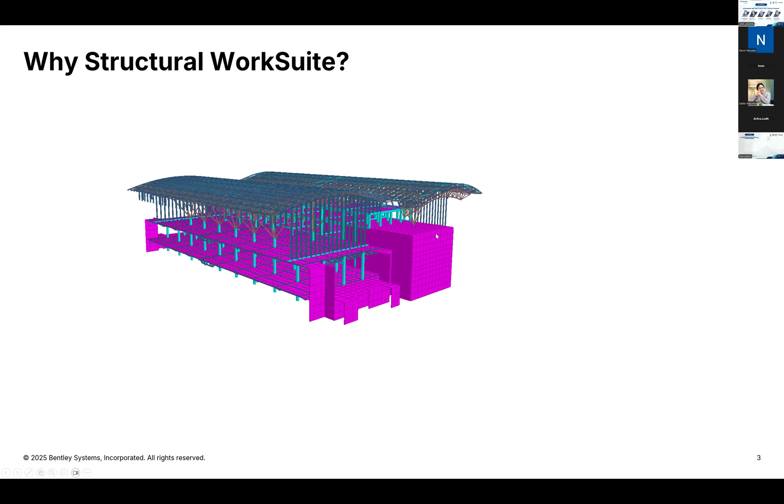Now you might have a question: why am I talking about Structural WorkSuite? Generally, our projects are something similar to this—we not only simply create our model, we will have to analyze and design our model as well. So our model can simply be a concrete structure, can simply be an industrial shed or any steel structure, or it can be a combination of steel structure and concrete structure. In such a case, I'll show you how we are using Structural WorkSuite.

If you're having a project, to be honest, and if you plan to start your model and complete it, we do not recommend you to only use STAAD Pro. We recommend you to use all the different products that we have to offer. There are several components to it.

First, we will have to analyze and design the steel members. We will have to design the foundations. We will have to design and detail the concrete slabs. We will have to design the steel connections, and the concrete column, beam, and shear walls will also have to be designed and detailed.

Then after that, for the steel structure part, we will also have to generate the general arrangement drawings, right? So these are all the different components involved in creating your project.

So for that, first, for analyzing both your steel and concrete structure, we can use STAAD.Pro. STAAD.Pro is also capable of designing your steel members.

Once that is done, we will move on to Steel Autodrafter, which is also present with STAAD.Pro. That is used for generating your general arrangement drawings.

Next, after you have created your steel model and generated the general arrangement drawing, you will go ahead with the steel connection design. For that, we move on to RAM Connection.

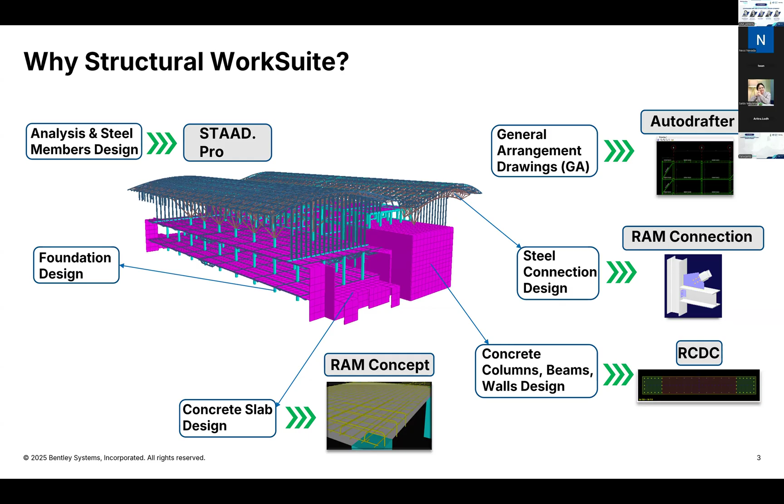If you are looking strictly to design your post-tension slabs, flat slabs, or RCC slabs, you can move ahead with RAM Concept as well.

And finally, without foundation, our project will never be complete. So for that, we will move on to new STAAD Foundation Advanced. These are all the products that we need to complete our project.

That is the reason I have introduced you to Structural WorkSuite. By the end of this slide, you should have a fair idea about the products you need to include in your project and which product is capable of doing what.

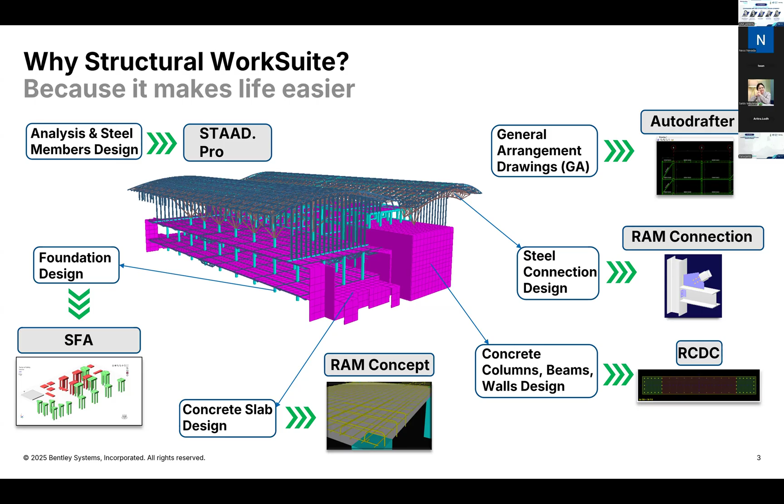Now let us move on to our next product, which is STAAD.Pro. The latest version of STAAD.Pro is STAAD.Pro 2025.

Let's talk about the versatility of STAAD.Pro, in which sectors can we actually use it. STAAD.Pro can be used in building sectors, power plants, bridges, industrial sheds, renewable, heavy civil industries, airports, oil and gas, mining sectors, and even transmission towers can be done in STAAD.Pro. Basically, you can name any sector and we have STAAD.Pro to help you in that particular sector.

If I talk about the multi-material design codes that we have, STAAD.Pro is capable of designing hot rolled steel sections, cold formed steel, concrete, aluminium, and timber. These are all the design codes available in STAAD.Pro, and when you buy STAAD.Pro, you don't have to buy the code separately. More than 90 multi-material design codes of different editions are already included within STAAD.Pro, and you are entitled to use all of them, anything that you wish to use.

Let's quickly have a look at all the advanced analysis capabilities of STAAD.Pro. STAAD.Pro is capable of performing static analysis and dynamic analysis. Under dynamic analysis, you can use response spectrum, time history analysis, and even modal analysis. We are also capable of dealing with P-delta analysis, geometric nonlinear analysis, and nonlinear cable analysis as well. Dynamic steady state analysis can also be done in STAAD.Pro.

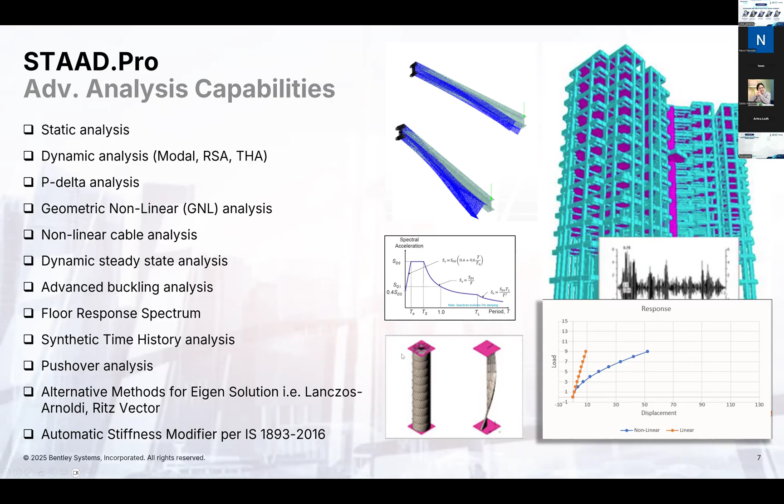You can do advanced buckling analysis, floor response spectrum analysis, and for time history analysis you can perform synthetic time history analysis and pushover analysis. For solving your eigensolution, you can choose between Lanczos, Arnoldi, or Ritz vector methods. These are basically all the different analysis capabilities that we have in STAAD.Pro.

Every year we come up with new inclusions and new modifications in STAAD.Pro. Let's quickly have a look at what new inclusions we have added in this version.

As I've already mentioned, we use different products to complete different parts of the project. For example, if I talk about foundation design, after we have created our model in STAAD.Pro, we can directly go to foundation design from here.

This is already linked with STAAD.Pro. We can directly move to STAAD Foundation and design the foundation there. So what happens is we don't have to manually input the reactions or the analysis data to foundation. STAAD Foundation Advanced will automatically import all the analysis data from STAAD.Pro itself, and the accuracy is very high.

We have actually tested it while developing this new product, so the accuracy of this data transfer is very high.

The new inclusion here is that STAAD.Pro has been updated to work more closely with the latest STAAD Foundation Advanced, which is STAAD Foundation 2025. This helps us with designing foundations like mat, isolated footing, combined footing, and pile caps, using the support reactions from the STAAD.Pro model.

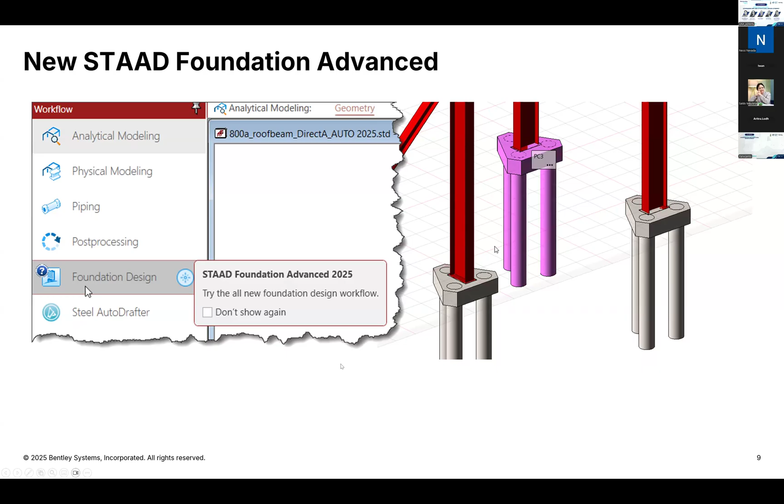Next, we have also come up with improved serviceability design. If you are designing a steel structure, there are two main things we check: strength and serviceability. Under strength, we make sure each part is strong enough to handle the forces on it. In case of serviceability, we make sure the structure doesn't bend too much, which could cause cracks. This is also called the deflection check.

To perform a deflection check, STAAD.Pro needs to know the real start and real end of your member or beam. If you see a single beam in case of a truss member, say the bottom chord, in STAAD.Pro whenever it detects any nodes in between, this entire beam will be divided into small fragments, small analytical parts. But in reality, this is a single beam, and we want to check the deflection for the entire beam. In such a case, we will have to instruct the program the real start and real end of this beam.

For that, there are two parameters used, DJ1 and DJ2. DJ1 marks the start node of your member, and DJ2 marks the end of your member. We perform this check for the local axis, both the local Y and local Z direction. Now you have the provision to add the start and end point of your members in both local Y and local Z direction.

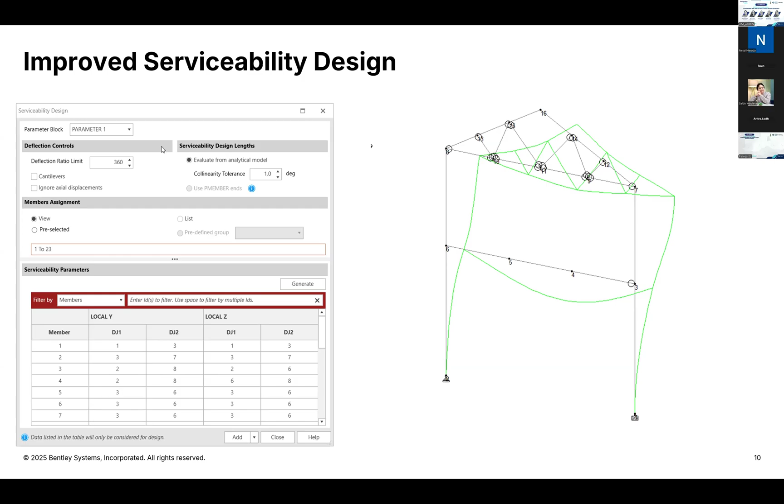Next is advanced combination rules. This is very important for users who are using Eurocode. In Eurocode, specifically EN 1990-2002, you have the provision to map the load categories to the Eurocode action, like mentioning which is your permanent or variable load, instead of just how STAAD does it.

STAAD basically tells you to mark which is your dead load or live load. But in case of Eurocode, if you want to mention which is your permanent or variable load, that can be done in this new advanced combination rule. This new system includes 11 Eurocode combination rules as of now, and you can customize your own combinations using Eurocode load types like permanent, pre-stress, accidental, seismic, and variable if needed.

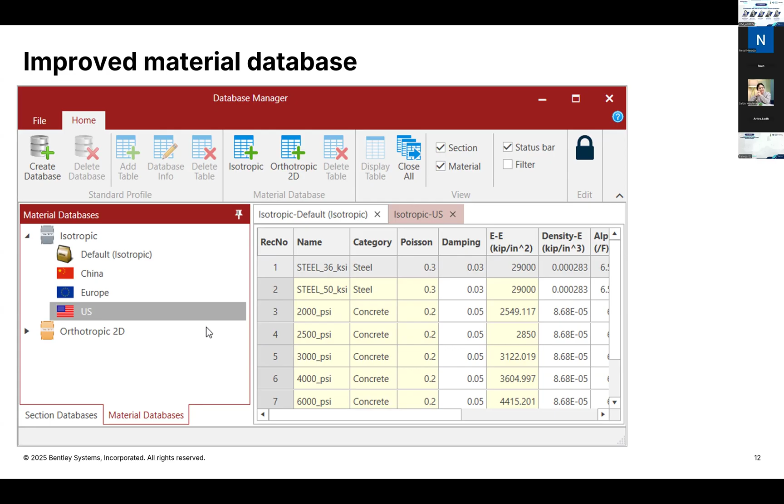This is basically how you can do it. This is the same example I showed you, how you can add your material. You can simply add it from here. You can name your material, the category, the Poisson ratio, damping, the density - all this information you can provide. And next time when you select the material, you can simply reach out to the material you commonly use or that you have created.

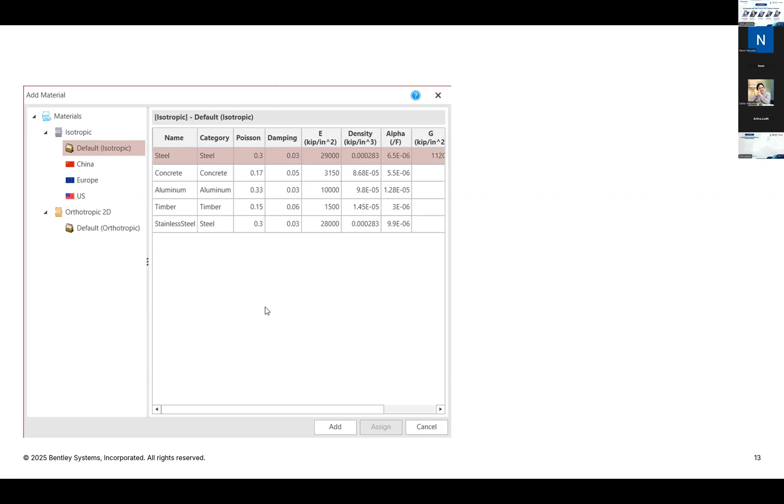Okay, so that was all I had to show or tell you about the new STAAD 2025. Now, let us move on to the interoperability of BIM with STAAD Pro. Before getting into the interoperability, there is one thing I would like to mention.

Previously we used to use ISM, which was Integrated Structural Modeling. ISM was Bentley's desktop level interoperability framework, and it basically focused on file-based workflows where structural models could be exchanged via an ISM repository. So whenever we used to create any model, we used to create the .ism.dgn file. For example, STAAD could be interoperable with Revit or Tekla. So whenever we are taking any model from Revit, we create one .ism.dgn file that we pull into STAAD.

Now we use iTwin Synchronizer. It's the same thing - iTwin Synchronizer is built on the same idea, but for the cloud. So instead of exchanging data via a local ISM repository, the iTwin Synchronizer publishes models to the cloud or iModel. We have the provision to export and import our file from the local file as well. But it still performs mapping or classification steps very similar to what ISM used to do, except the output goes to the iTwin ecosystem instead of just another desktop tool.

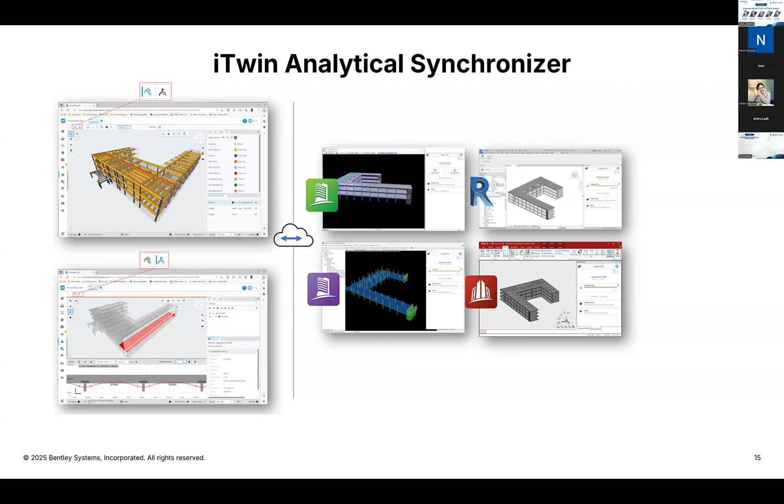So as I've already mentioned, there are two ways of doing it - two modules of iTwin services. One is via cloud, the other is from a local file. The file-based workflow allows us to synchronize our model locally, whereas the cloud-based workflow allows us to synchronize our model to the cloud. In today's session, we are only going to focus on the file-based workflow.

Here I have shown you the same way how we can do it - first we will review our model, and I will show how we can map our different structural elements, and finally we will be able to pull it into STAAD Pro. This is how the interoperability looks like. This is my model, and this is how, once we have pushed it to the iTwin model, it looks, and finally we will be able to pull it into STAAD Pro.

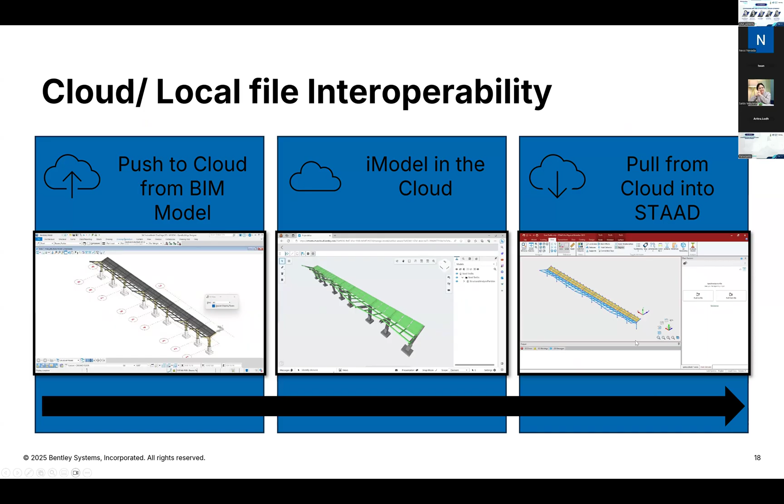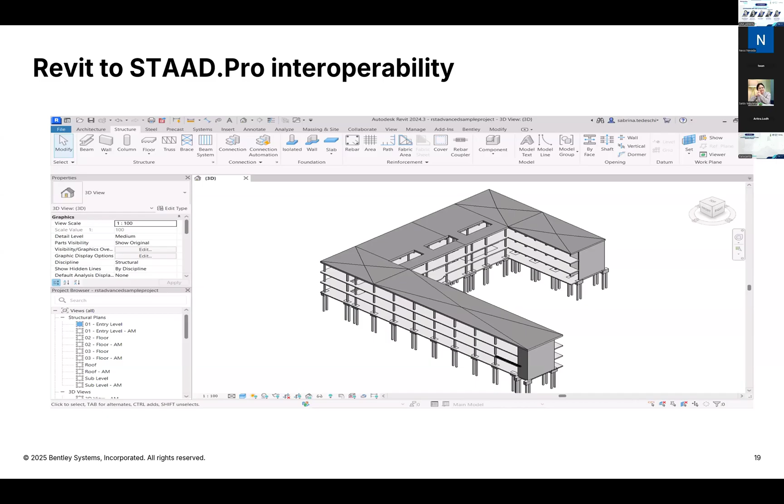Okay, since I have already recorded this part, not the entire thing, I recorded the part where I opened the third-party software and showed how we can map the structural elements and bring it to STAAD.Pro. That part I've shown because of my organization policy, and I have not directly opened the software, but recorded this part for you.

So I'll just play. This is Autodesk Revit that you can see. And here we have a tab called Bentley, where we have an option called iTwin services. Under iTwin services, we basically push our file to the iTwin services.

So what happens here is when we push, we are sending the latest version of our design files from our desktop to the project iModel. That is necessary. Once that is done, once we have pushed our model, we will save it.

And here if I show you, I'm just pushing my model. And this is how I will be able to map it. So whenever we are bringing the Revit model to STAAD.Pro, we are basically mapping. You will see different mapping we are doing.

We are going for load case export mappings. We will go for material mapping and structural components as well. So basically mapping refers to the process of transferring and aligning elements, materials, or structural properties between the two programs so that the model behaves correctly.

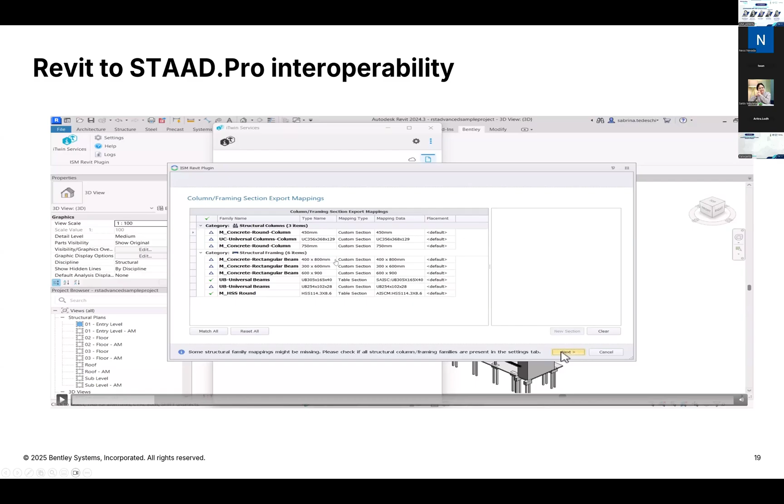Similarly, I'll map the materials, and this is the columns. Some of them will be read by STAAD.Pro as a UPD table, or user defined table, but that is fine, we will be able to read it.

After that is done, we will export the members, and this is how the export is happening. So the process is very simple: once we open Revit, we go to the Bentley tab, which will automatically be there.

Once we enter the Bentley tab, we go to iTwin services. Under iTwin services, we will save this model and push our file. After pushing, we simply map the loads, materials, and sections. Once everything is mapped, the data starts to export. Here we can see the ISM Revit plugin being used, and finally the model has been successfully pushed.

Now once this is done, this is how the iTwin Analytical Synchronizer looks. From here you will be able to add certain components - all the different components are getting shown to you, so whichever component you want to export, you can select it from here.

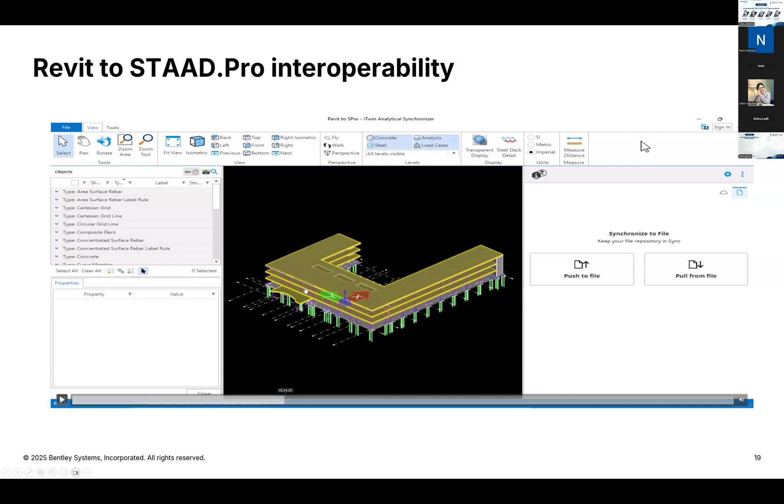Whichever component you do not wish to export, you can simply omit at this stage. Say I don't want to export the top roof, or maybe this part - in the iTwin Analytical Synchronizer I have the provision to either include or omit a particular component.

Now once this is done, we have successfully pushed our model. Now we will open STAAD.Pro and simply pull it from the I2 analytical synchronizer. We can only pull our model in the physical modeler. We have the provision to import in the analytical part as well, but I'm showing you the physical modeler. STAAD.Pro comes with two different modules: one is analytical, the other is physical.

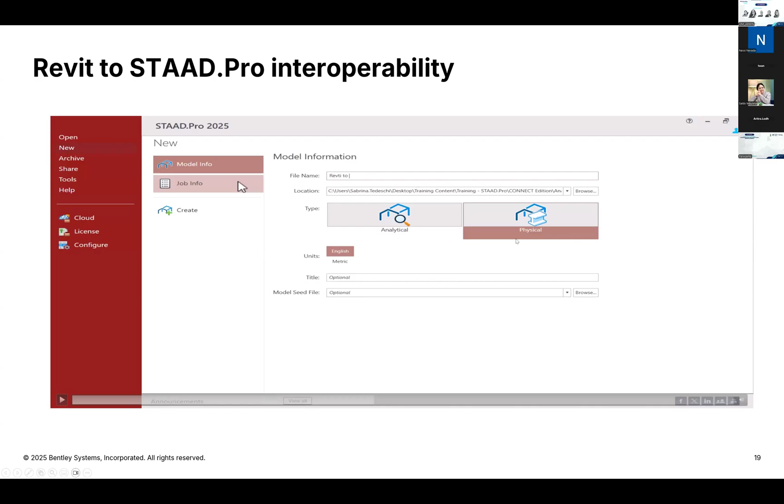Okay, if I open the physical module, it looks something like this. In STAAD.Pro's physical module there is also an option called iTwin services, just like Revit. If you click on iTwin services, you will have the provision to pull your model.

Yes, this is the one I was looking for. So whenever you're importing any model from any third-party software, you will pull it. And in case you are exporting your model, you will push it.

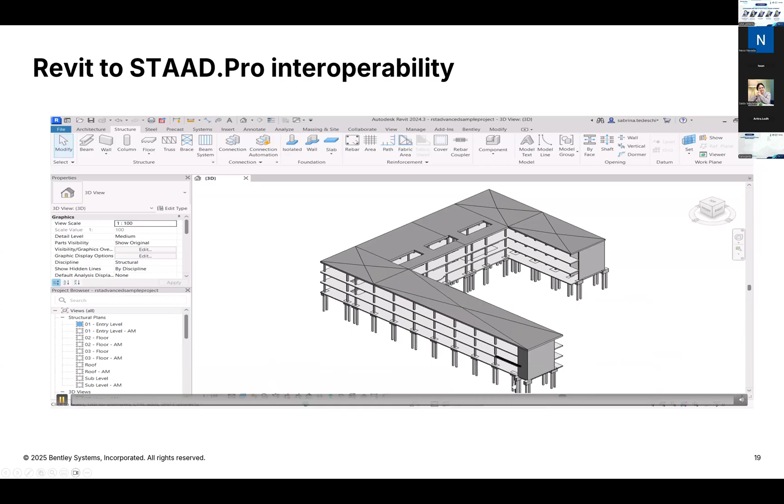Just give me a moment.

Okay, we will pull it. Once we have pulled it, there are two options, two ways how we can do it, as I've mentioned. Either you can use the cloud thing or you can use the local file. In my case, I will use the local file. So here you can select the .ism.dgn that we have created, and you will simply open it.

Once we open it, it will import the entire model. Now, till here, this is the process. Now I will quickly start sharing the model with you.

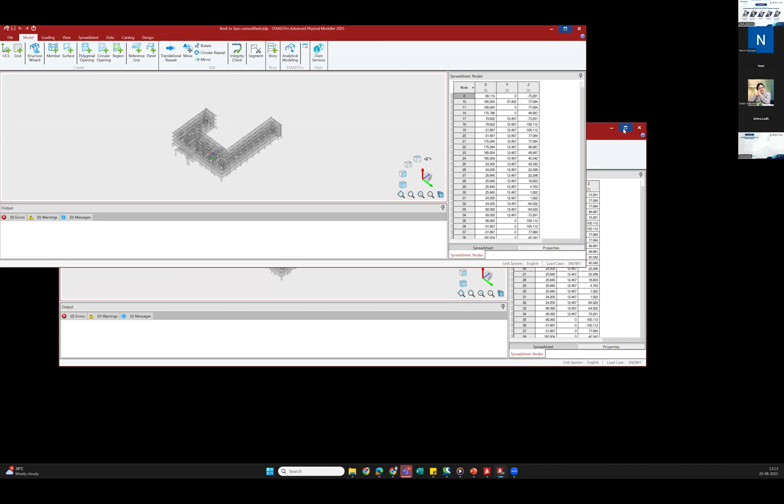Can you confirm if you can see the STAAD.Pro model that I'm showing? Yes, can see, Aritra. Okay, thank you. So this is the model that you can see.

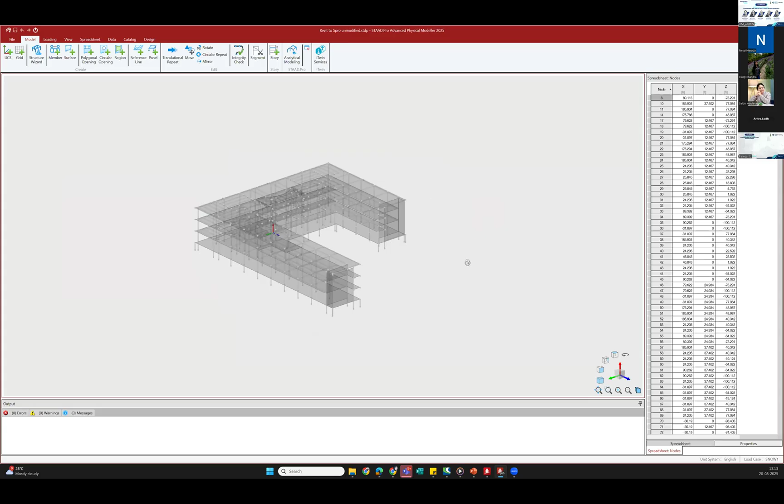So this is the 3D rendering. If you wish to change the view, this is how you can see the model has been exported. And we imported it to STAAD.Pro, and the same model was shown to you in Revit.

If I go to the catalog, you can see these are all the different materials that has been used. These are all the sections.

And if I analyze, you can simply analyze your model from the view tab, and then you will be able to bring it to the analytical modeler.

Now in here, you also have the provision to add your loadings. So if you want to add any particular load, you have the provision to do that as well.

So here you can see we have a live load, we have a snow load that is already there. In addition to it, if you want to add any load case, you definitely can add your own load case in here. Or some of us also prefer to add the load cases and load combinations in the analytical modeler.

In such a case, you will simply go to the analytical modeler, return to analytical modeling, and it will take you to the analytical modeler. This is how it will do.

This particular model will take a lot of time because it has got a lot of plate elements already attached to it. So what I will do is I will take a very similar model that also I have imported from Revit, and it's the same model almost, you can see.

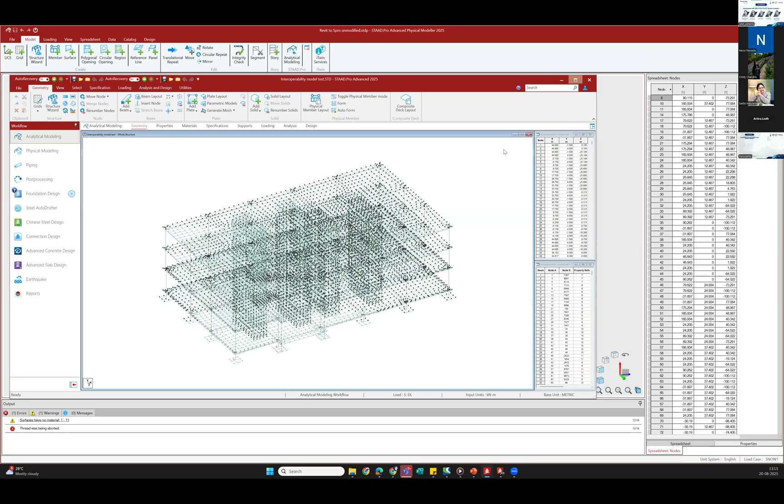I've just taken a part of it and I have already imported it to analytical modeler. Okay, so this is how the model will be imported.

You can go ahead with the properties. You can see all the different properties that I've added. Just give me a moment. Let me... Okay, so you can see all the different properties that we have added in here.

All the UPT files I've mentioned you that whenever we are importing any model, some of them comes as a UPT file, user defined profile. And the plate elements, they are also added some plate thickness to it.

Now, if I go to the loading, you will see that all the loads are also imported. Your dead load, live load, along with some combinations are imported. In my previous model, I had live load and snow load, but in this model, I have the dead load and live load.

Once you have added all the load cases, you also have the provision to modify your model at any given point. You can add some supports, or you can add any release conditions to your model, whatever you want, you can change it in this position.

Once that is done, under analysis and design, you will simply run the analysis. So we need to analyze our model. Just excuse me because I have two different monitors here, and you can see my model is getting analyzed.

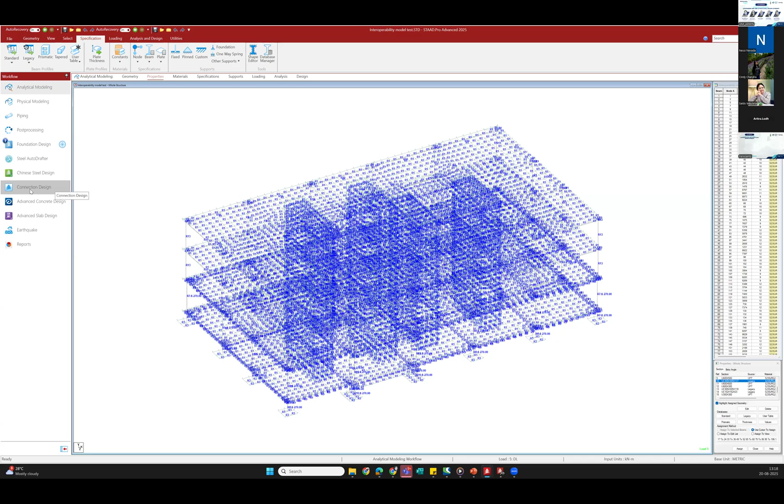As I've already mentioned in the workflow, you don't have to go anywhere. In STAAD.Pro itself, there is a provision to design the connections. If I click on connection design, automatically it will direct me to RAM connection, which is integrated within STAAD.Pro. The main USP of this is you don't have to manually add the input, the reactions, or the member end forces or anything in here. You will simply see that your model is getting transferred to RAM connection.

Now, if you wish to see which are your beam column flange joints, you can see that. These are my beam column flange joints. If there are any other beam column web joints, you can also see that these are the beam column web joints.

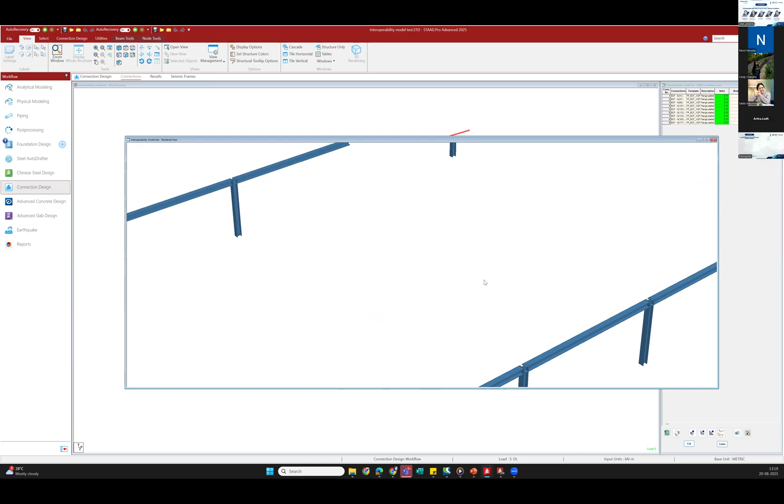So say for example, if I go to the beam column flange joint and just view the selected objects, if I go to 3D rendering and expand this here, and expand this even, you can see STAAD.Pro RAM Connection is automatically detecting which joint is my beam column flange joint. These are the joints that are present in my model, and it is already detecting that this is my beam column flange joint.

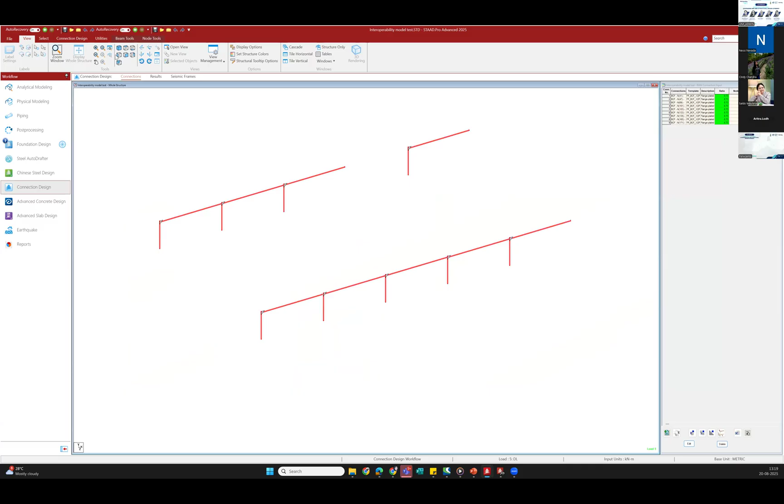Similarly, if I go to view whole structure, go to connection design, and show you the beam column web joints, if I view the selected objects and perform the 3D rendering, here also you can see this joint is through my web. So RAM connection is automatically identifying the joints based on the geometry that we have created.

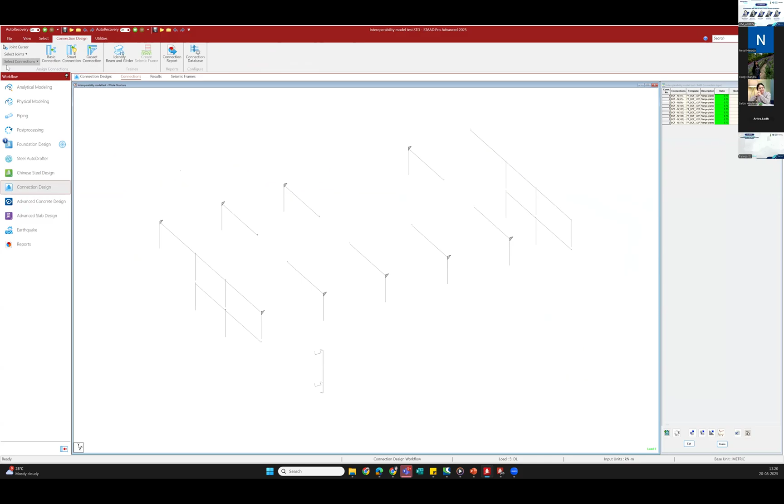This model was actually created in Revit, right? And from there we have imported to STAAD.Pro, and from STAAD.Pro we have analyzed it, and then we have got it to RAM connection. So you can see how smooth this interoperability is. And if I go to view, display whole structure, so this is the entire model.

Now for this session, I have already created a beam column flange joint. I have already designed one connection for you. If I double click on it, you will see it has opened somewhere. This is the joint that I have selected, and you can see the demand versus capacity ratio. These are all marked in green, which means all of them have passed. The limiting value, as usual, is 1, and this is how the joint looks like.

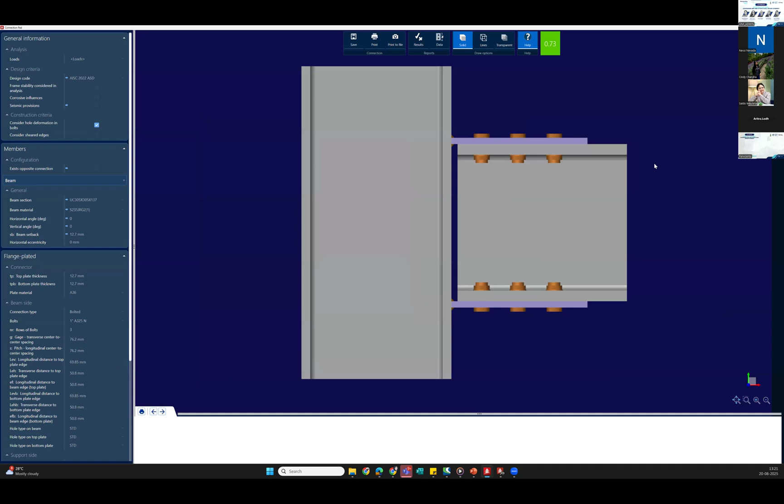This is the connection that we have designed, and this is the line diagram that you can see, which helps you understand the connection better. If I want, from here this is called the connection pad, and in here you will be able to make changes. So if you want to change it to a weld, you will see it getting changed to a weld, but the demand versus capacity ratio changes, which is very obvious. So based on the connection, this demand versus capacity ratio will be automatically updated.

From here also, you have the provision to select the support type, if you want to change the top plate welding, whether it's fillet or if you want a full penetration. All this information we can change. The pitch, the gauge of the bolts, the number of bolts in a row can be changed. So all this information can be manipulated from here.

Now, once this is done, I have the provision to check the report. This is how the report is going to look like. I can also fetch a detailed report with the design calculation.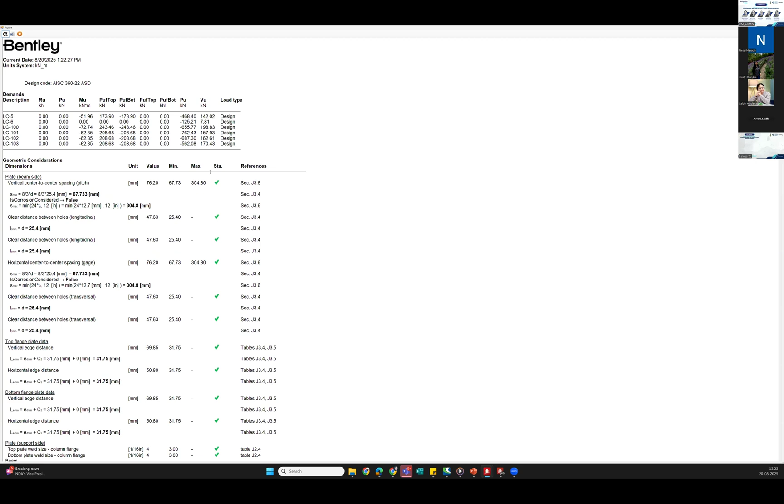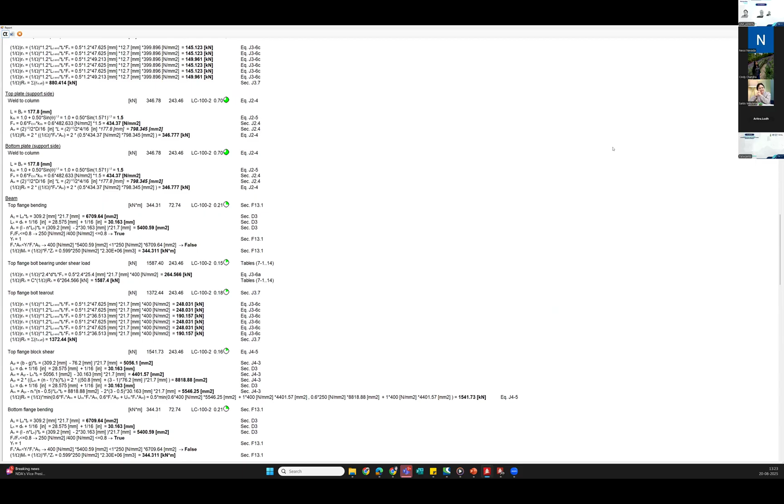Yes, so you can see a detailed calculation along with the formulas shown to you with the codal reference. So you definitely can save it in a doc format and produce it to your clients. So the interoperability is that smooth. That's all I wanted to show you, and you can also see how easily you can get all the different reports from STAAD.Pro. So this is what I had to show you for RAM connection.

Now, similarly, you can do it for the base plates. You can get the report for the base plates, and for any braces, that also can be done. So that is a different discussion.

Now, if I go back to my analytical modeler, and this time if I want to design the beams, let's go to the advanced concrete designer, which will take me to RCDC. So here, let's take the beams for instance. It will take some time to open RCDC.

Just allow me some time.

Hi Aritra, hello. There's feedback from participants asking if we can go a bit slower. I'm so sorry, yes okay. Let me know where I should start and I can go back to that same step. Just a bit slower when you're speaking, thank you. Oh okay, sorry. It's okay.

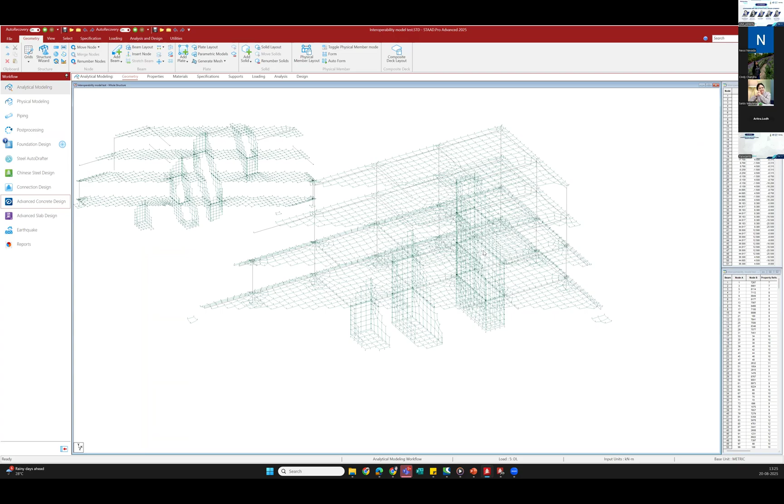Okay, so this was the model that I had shown you. Wait, it is coming. This was the model that we have taken from Revit. Okay, it is showing in a bit weird way. So this was the model that I had taken from Revit, I have imported it to STAAD.Pro.

The transition, I have shown you how smooth it was. And after you have taken your model to STAAD.Pro, you will analyze your model. Why do we need to analyze our model? That is because whenever we are moving ahead with any other workflow, be it RAM connection, RCDC, or RAM concept, we need the next product, which in this case is RCDC. RCDC will actually read the analysis data, the member forces, the reactions, everything will be read by RCDC, and based on it, the data transfer will happen. And for that, we need to analyze our STAAD.Pro model first.

In case of the RAM connection that you had seen, I could actually see which are my beam column flange joints, which are my beam column web joints. How RAM connection could do it was by reading the geometry. Now, if you do not analyze your model, RAM connection is not capable to detect or understand the STAAD.Pro model. So that is why it is absolutely necessary to analyze your model.

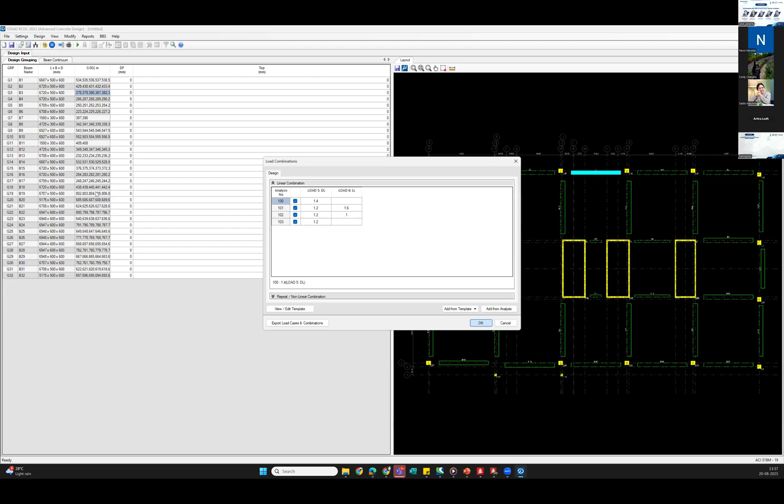Once that is done, we will just add the loads. RCDC will automatically detect the loads. Remember, we had added dead load and live load in my STAAD model that got transferred from the Revit file. RCDC has already read it, that I have my dead and live load. And from here, I will be able to add the load cases. These are the load combinations that I have added. These load combinations I had already added in my STAAD model. RCDC has read the same thing and I have just simply added it to RCDC. Once I click OK, I will simply design my beams.

So these are the reports. Some of my beams have failed. I have purposely kept some of the beams as failed and some of them have passed, just to show you how it looks like. The ones that have failed are shown to me in red, and the ones that have passed are shown to me in green. I have purposely kept this to show you how it looks like.

So if any of my beams fail, we can go to reports and go to failure diagnostic. The failure diagnostic will actually show me where it has failed. You can see this is failing in shear, the tau C max. That is what we will have to check. Based on the failure diagnostics, we will make our changes to our beam and make it pass.

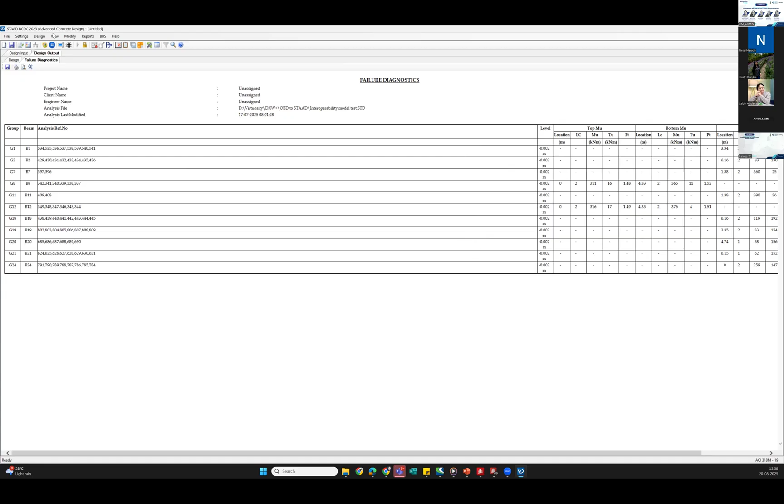If I go to any other beam, you can see this one has passed, beam B3. You can see that each beam is divided into 3 parts: the left part, mid part, and right part. Similarly, the bottom reinforcement is provided for the bottom part, and the top reinforcement is provided here. Along with it, I have got the shear reinforcement in all 3 directions, and this is the side face reinforcement.

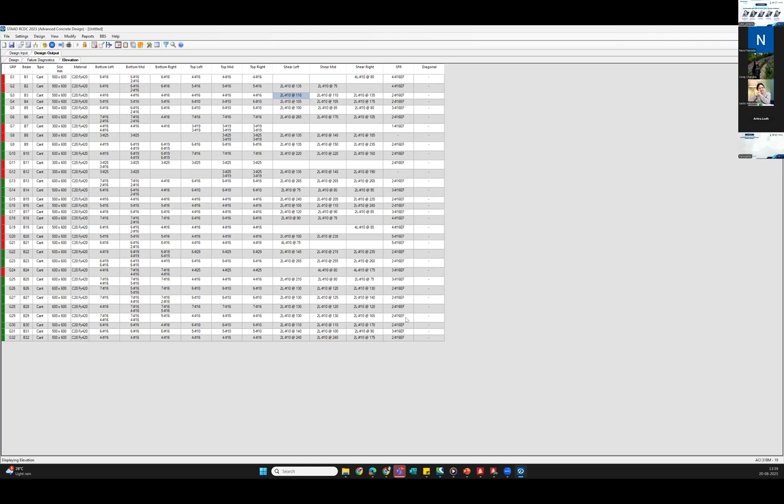Now, similarly, if I go to report and if I go to the elevation drawing of say beam B3, where I want to generate the elevation, the cross section, I want to see the section mark and the anchorage. If I click OK, this is how the report will be generated for this particular beam. This is the cross section with the detailing that you can see.

This you can save as a... give me a moment, let me save it. This you can save as a DXF format, and you can open it in any CAD software and make your changes, or the DXF format you can also produce it to your client.

Similarly, if I go to reports, if I go to the design summary, then I will be able to get the design summary of all the beams that have passed. Here you can see the flexure design calculation, the shear design calculation, the side face reinforcement, all these calculations are shown to me. Again, I can save it as an HTML file and I can produce it to my client.

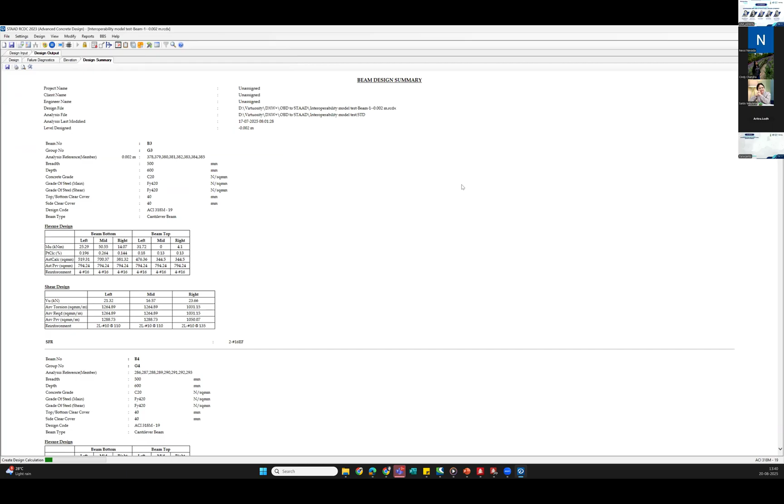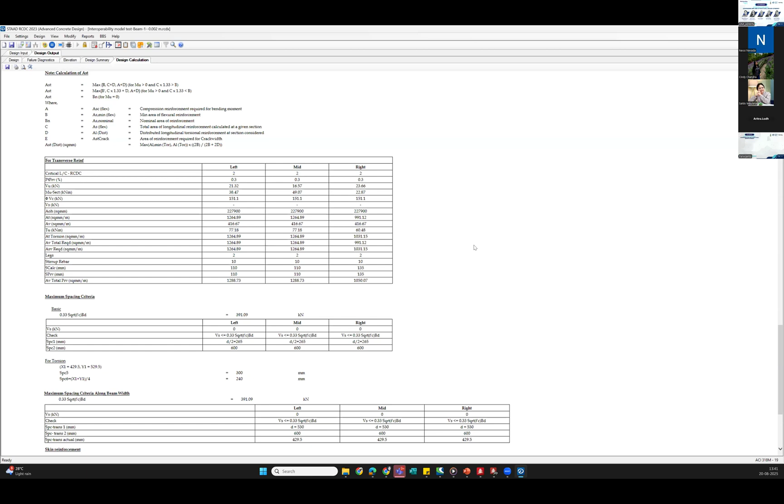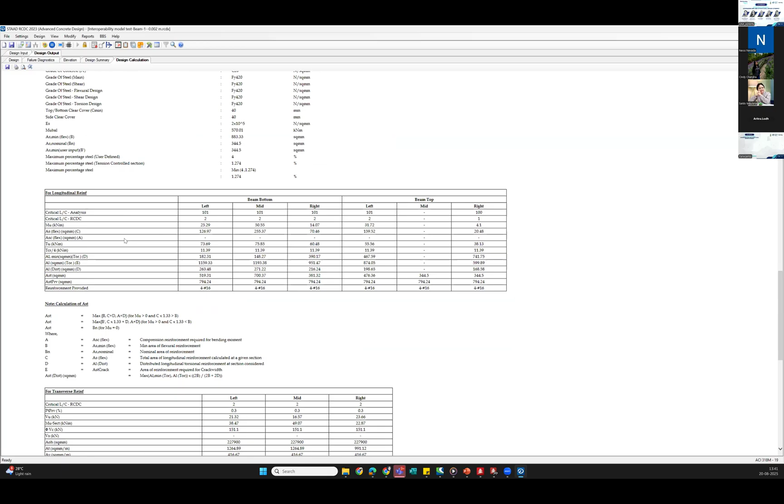If I want to go for a detailed design calculation for any particular beam, I've just chosen beam B3. Here you can see the detailed design calculation is shown to me, and the maximum spacing criteria, the transverse reinforcement, all this information is shown to me. Now you can also see that all the clauses from the code have been referred to in here. This is the detailed design calculation. Obviously, you can save it as an HTML file.

And finally, I can show you the bill of quantities. So if I select the bill of quantities and make it, you have the provision to change your currency. So if I change it to Singaporean dollar, you have the provision to make some changes from here.

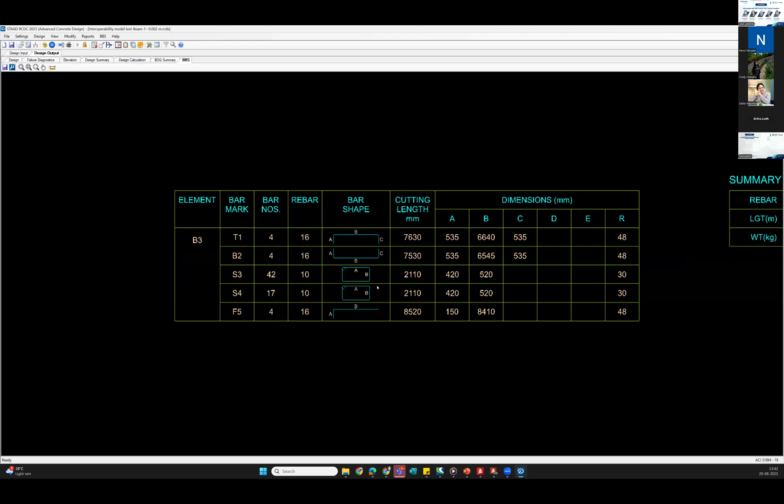So this is how the bill of quantity is going to look like. Now, in a similar way, let's generate the bar bending schedule for a single beam. So this is how the bar bending schedule is generated. Here you can see the cutting length, the bar shapes, and the bar numbers, everything is mentioned, along with the beam drawing.

So this is how RCDC is capable of generating your project. Now the design and detailing of your beam - I have just shown you for a beam. The same can be done for columns as well.

So by just taking your model from Revit, you can simply take it to STAAD.Pro, and from STAAD.Pro you can design and detail your concrete components. You can design your steel part. You can design your steel connections. Everything you can do it in STAAD.Pro.

Once that is done, as someone has mentioned to me - how do I, if this is the model that I have, and if I have made any changes in this model, okay, what I will do is I will go to iTwin services.

It is taking some time to open.

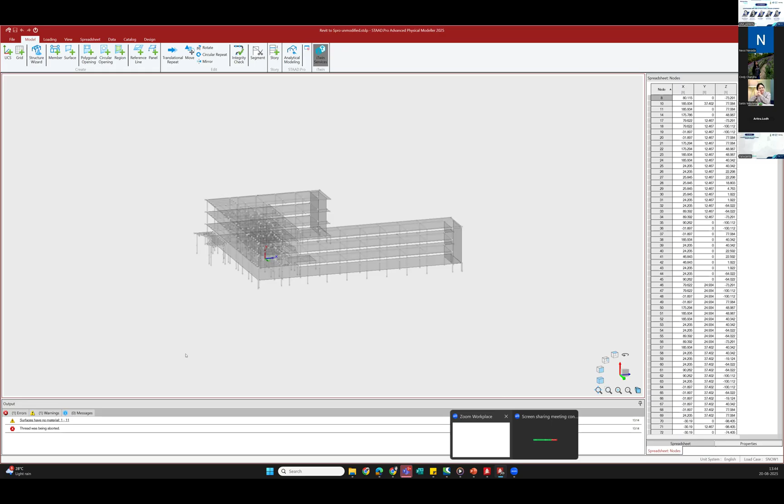Yes, this is the option. So if you click on iTwin services, you will be able to - so while importing the model from Revit, I had pulled the file. Now, while I will export it back to Revit, I will push this file, and again I will perform the same process of mapping it, and then I will pull it back to Revit. And that is how I will be able to see the modification that I have created in STAAD.

So you can see how seamless this process was. Just by doing some few simple steps, I could bring it to STAAD.Pro, make all the changes, get all the detailing and design, and then I have the provision to take it back to Revit as well. So this was the entire workflow that I wanted to share with you. I hope you found this informative, and if you have any question, please feel free to share with me.

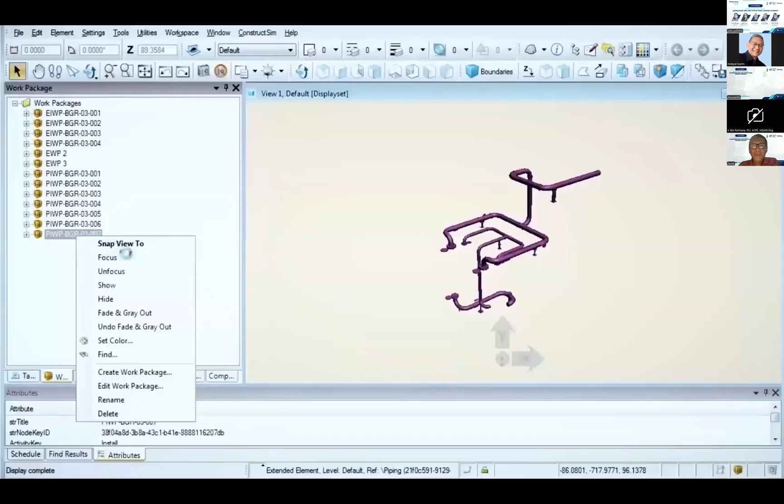Around the world, engineers and architects, constructors and owner-operators are using Bentley's software solutions to design, build and operate the infrastructure that sustains our economy and our environment. Together, we are advancing infrastructure. It is the front of house for our Emirates. So we wanted to do something spectacular, something iconic, something everybody will remember. We chose Bentley. There are not many competitors who could do a project on this scale. We wanted to use digital technology to do it in the best possible way. For this, we use Bentley software. We're very proud of the association with Bentley Systems. It's allowed us to be a leader in the industry. And more important is the Bentley management has worked with us to help us feel that comfort to work with Bentley. And that is what is driving us.

Bentley, advancing infrastructure.

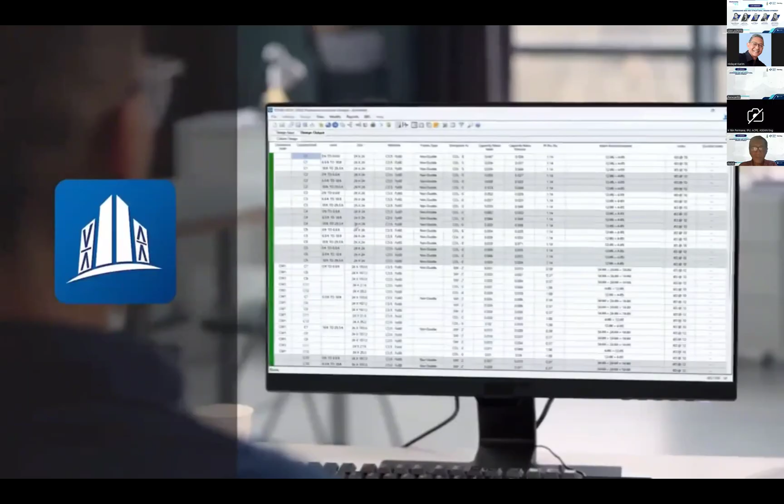Analyze and design any structure from simple to complex with STAAD, a comprehensive finite element structural solution from Bentley Systems. Model structures in STAAD using an efficient and intuitive physical modeling workflow. Exchange model data with other applications and disciplines, including your building information modeling environment, using STAAD's interoperability capabilities.

Model loads graphically using a variety of convenient features. Generate lateral loads in accordance with a variety of global design standards. Create custom load combination templates or generate load combinations using STAAD's load combination generators.

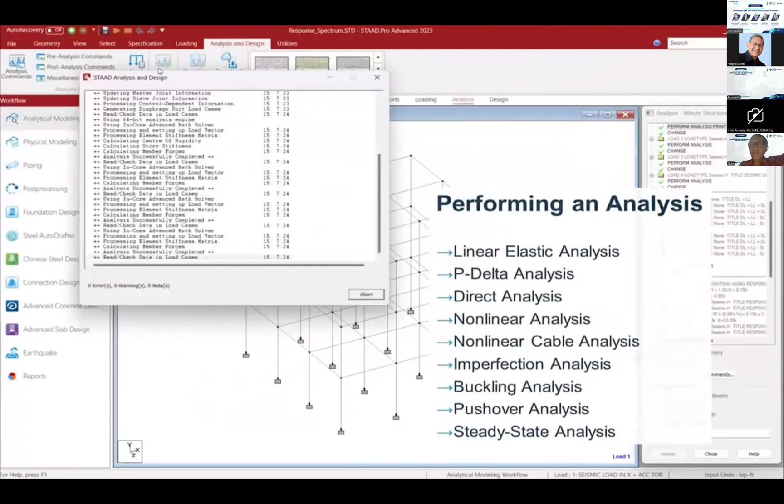Perform a stiffness analysis, second-order analysis, dynamic analysis, or pushover analysis, and review the analysis and design results graphically and in tabular format in STAAD's post-processor.

Design and optimize steel members and steel connections to meet global design standards for strength and serviceability. Design concrete elements with STAAD to meet global design standards and produce detailed design drawings and schedules.

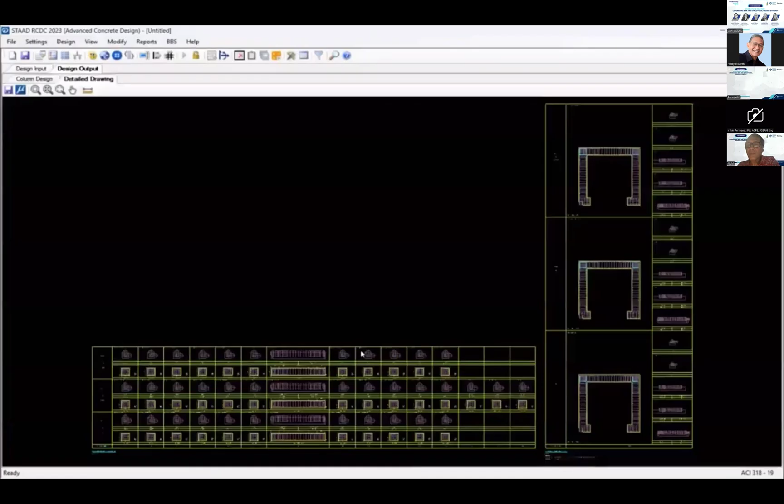Build fully customizable reports and generate working drawings for all your documentation needs. Choose STAAD, available as a standalone product or as part of our cost-effective structural works suite software bundle.

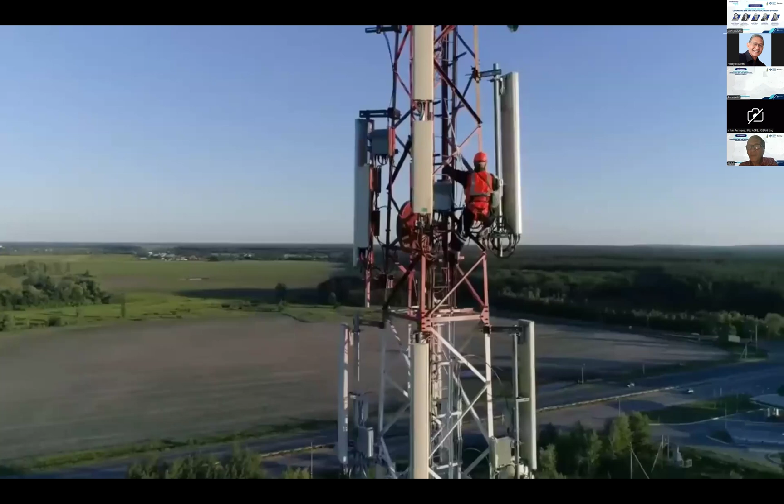Designing and analyzing telecom towers can be time-consuming and costly. The process becomes complex, especially when multiple tools are needed to ensure designs are compliant with the necessary standards.

Introducing Open Tower Designer, a comprehensive, purpose-built software solution that simplifies the tower design and analysis process. It takes the modern approach, digitizing data and streamlining workflows, ultimately enabling projects to be delivered quickly and accurately.

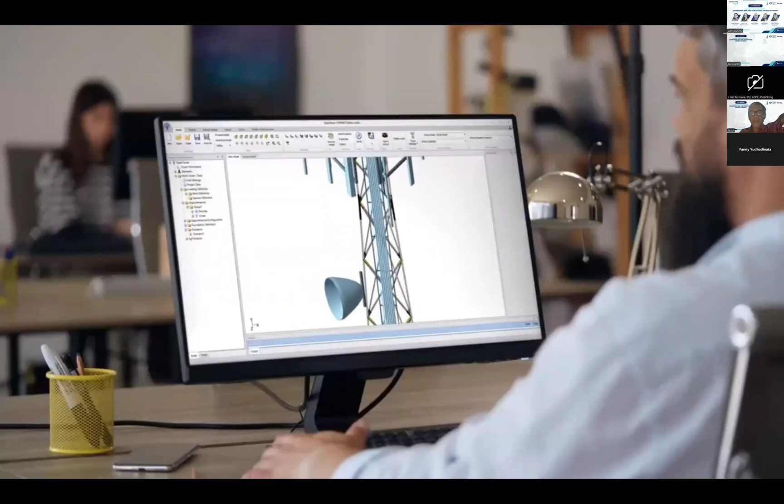With Open Tower Designer, models of monopoles, self-supported, or guy-mast towers can be simulated and visualized in 3D. From positioning of equipment to placement of feed lines, users can precisely see how their models will appear as constructed and perform analyses on the designs.

Through its built-in libraries and customizable catalog, tower structures can quickly be generated or revised to meet those last-minute work order change requests. To ensure tower designs can withstand wind, ice, and seismic load combinations, Open Tower Designer supports the latest global codes and standards that can easily be selected, changed, or updated.

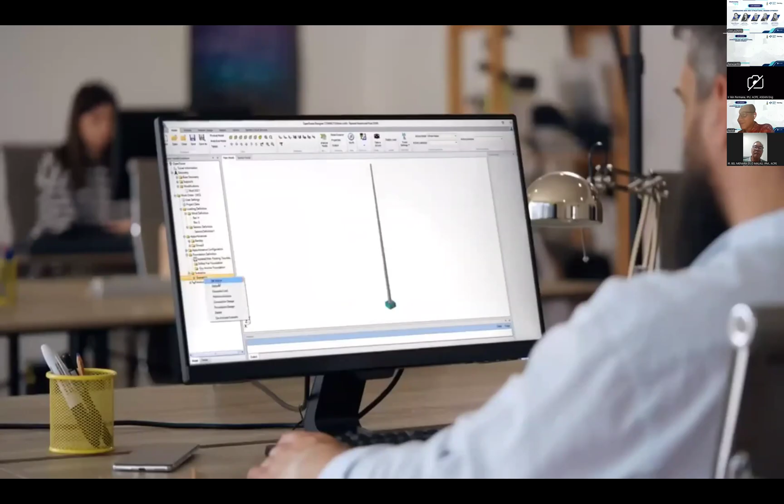Within the software's unique capability of scenario analysis, using layered analytical modeling, engineers can create and analyze different what-if scenarios to optimize tower capacity. But rather than create multiple project files for every scenario, the application saves analysis results all in one model file, providing a single source of truth to maintain historical data and the life cycle of the structure.

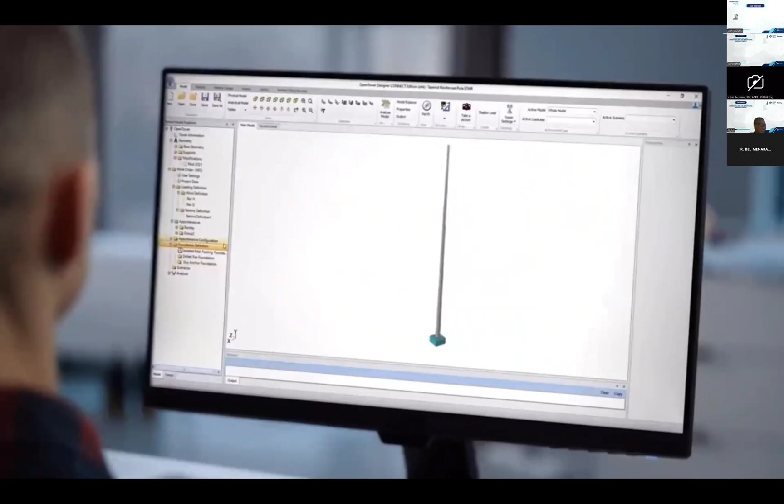And when it comes to foundation checks, its integrated foundation module allows users to automatically design and validate the safety of isolated footing, mat, drilled pier, and guy anchor foundations.

The tower model has been designed and analyzed. Reports are easily accessible with just a few simple clicks. Tower summary table or generate a detailed report.

Start designing and analyzing your telecom towers today with Open Tower Designer. As part of a suite of solutions, Open Tower Designer integrates with Open Tower IQ and Open Tower Mount Analysis to support the full life cycle of telecom tower design, analysis, and maintenance workflows.

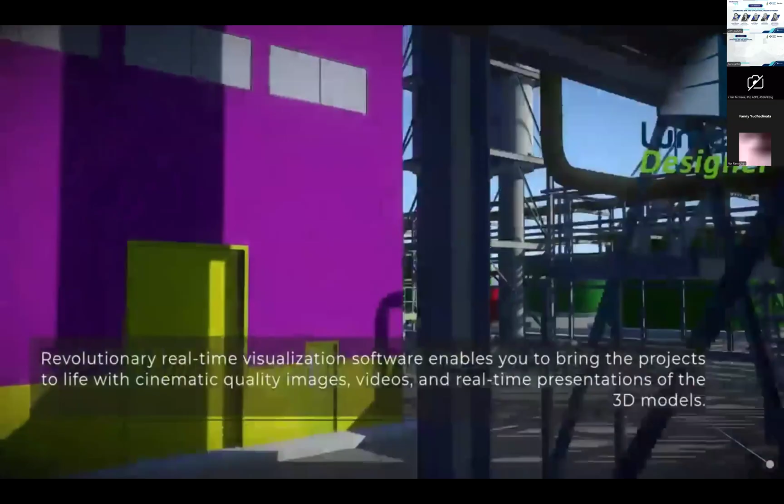Architects, engineering, and construction professionals are always under pressure to deliver safe, sustainable, and distinctive designs on time and within budget, whether they're working on buildings and campuses, civil, water and wastewater, or utility infrastructure projects.

But due to increasing design complexities, stringent codes and standards, a shortage of skilled labor, and lack of coordination and communication across multiple teams, project delays, cost overruns, and quality issues have become the norm.

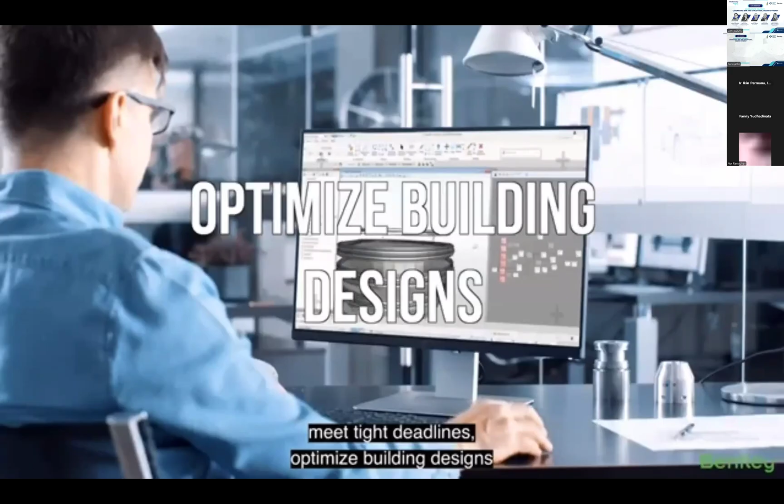That's why there's Open Buildings Designer, a comprehensive BIM software. It can help users take control of project costs, meet tight deadlines, optimize building designs, and enhance creative freedom.

Open Buildings Designer provides a connected environment so team members can collaborate when designing building information models while supporting third-party products in multiple file formats.

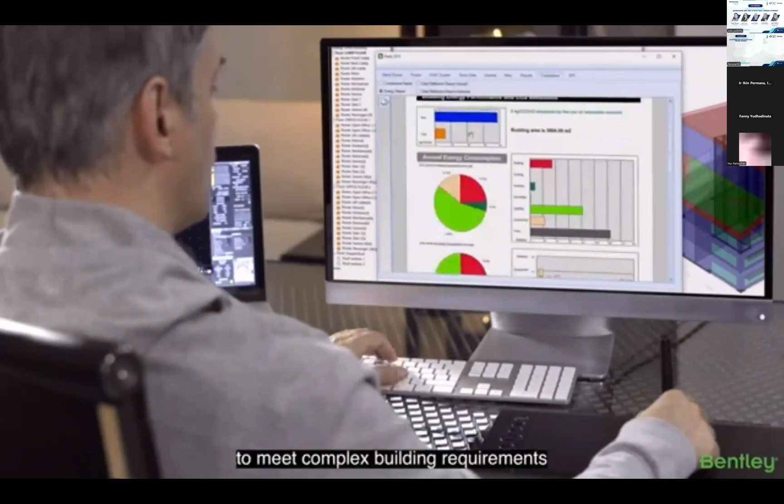This powerful BIM application includes Open Buildings Energy Simulator. Users can design, simulate, and analyze building energy performance to meet complex building requirements and achieve sustainability goals.

Open Buildings Generative Components, an associative and parametric modeling system, helps automate design processes and accelerate design iterations. Open Buildings Station Designer provides functional space definitions and design components to simulate rail and metro stations of any form, size, or complexity.

Open Buildings Designer has affordable and flexible pricing, expert services, and includes customizable training, making it easy to get started. Open Buildings Designer. Try it today.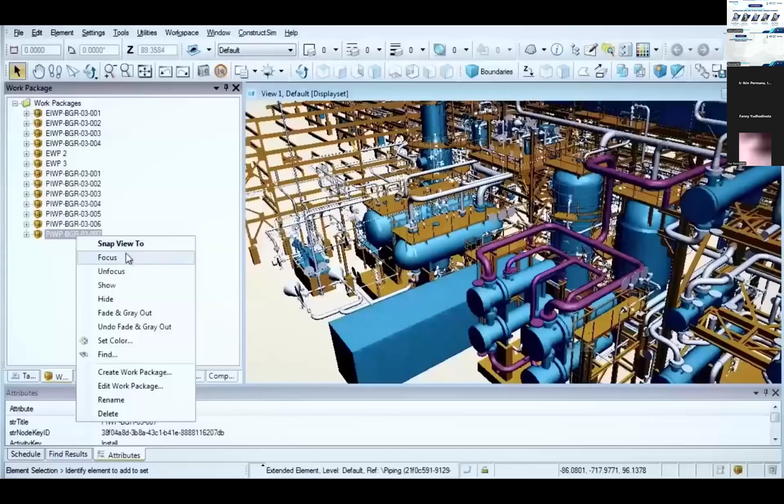Around the world, engineers and architects, constructors and owner-operators are using Bentley's software solutions to design, build and operate the infrastructure that sustains our economy and our environment. Together, we are advancing infrastructure.

It is the front of house for our Emirate, so we wanted to do something spectacular, something iconic, something everybody will remember. We chose Bentley. There are not many competitors who could do a project on this scale. We wanted to use digital technology to do it in the best possible way. For this, we use Bentley software. We're very proud of the association with Bentley systems. It's allowed us to be a leader in the industry. And more important is, the Bentley management has worked with us to help us feel that comfort to work with Bentley. And that is what is driving us.

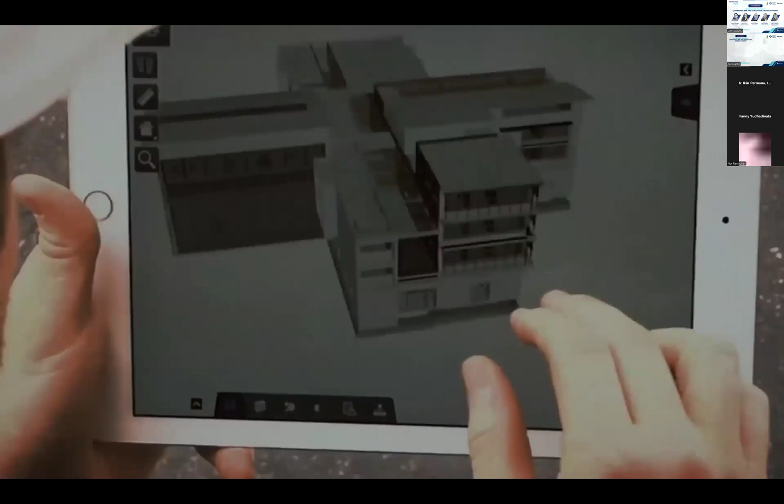Bentley, advancing infrastructure.